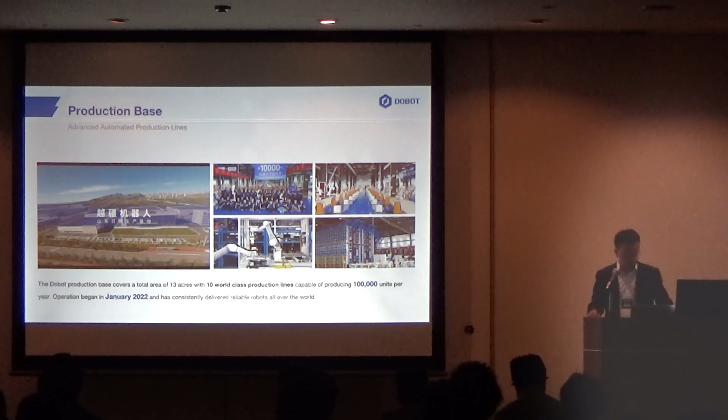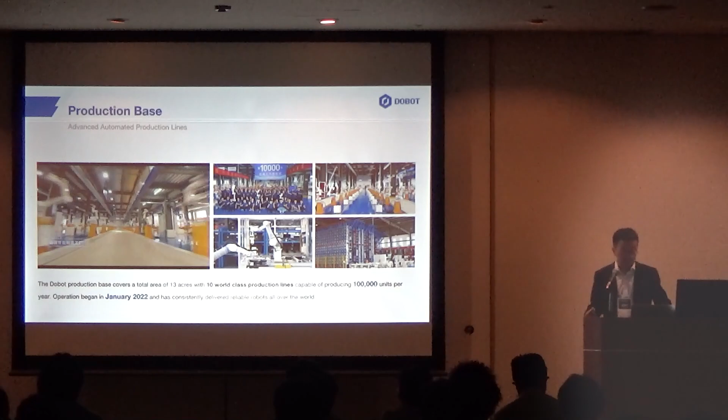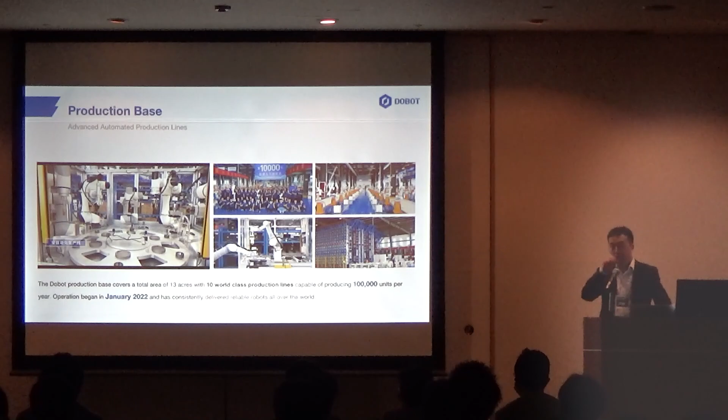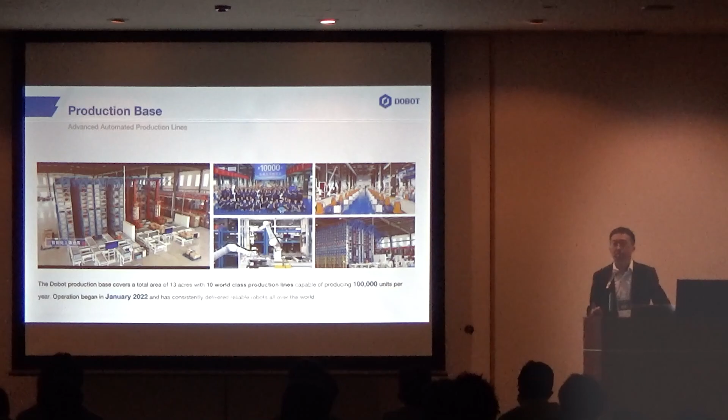In order to provide the best quality products, we also started to build our own production base in Shandong, China. With this factory, we can build our own production team and quality control team in order to have better quality products, because quality is very important, especially for a robot. Our production base has a capability of producing over 100,000 robots per year. The factory has been in operation since January of 2022, last year.

With the epidemic over, now we are speeding up our steps to go overseas. So we have started having a lot of events around the world, in Germany, in Japan, and other places.

Here is the whole family of DOBOT products. Starting from the middle, the DOBOT Magician. We developed this small desktop robot since 2016. In 2017, we developed DOBOT M1, and in 2020, we launched our CR series.

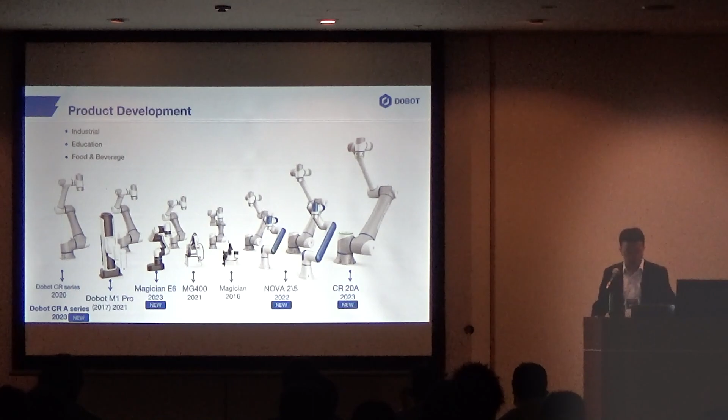After that, we sped up our process of development because we have accumulated a lot of technology about robots, and also we built a strong development team. We then launched our MG400 in 2021, and the Nova series, Nova 2 and Nova 5, in 2022. This year, we have the new generation of DOBOT CR series, and also the biggest payload CR20A, the one with 20 kilo payload, which we are going to launch this year. We also developed a Magician E6 for education. The robot will also be on the market this year.

First, I'm going to go through the CRA series. The CRA series is a totally different series from the CR series. But both the CR series and the CRA series will be on the market for the next few years. So it's not just a replacement, but it's an upgrade, a new series alongside the CR series.

The CRA series is a fully enhanced new generation. The A stands for advanced, with better performance and better reliability, higher protection for dust and water, and a totally new software architecture for the future.

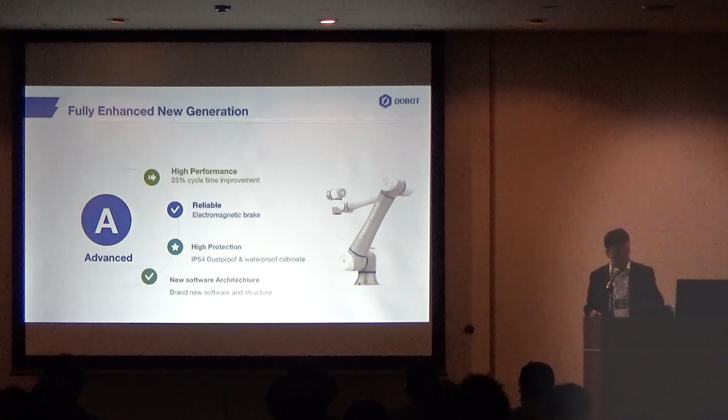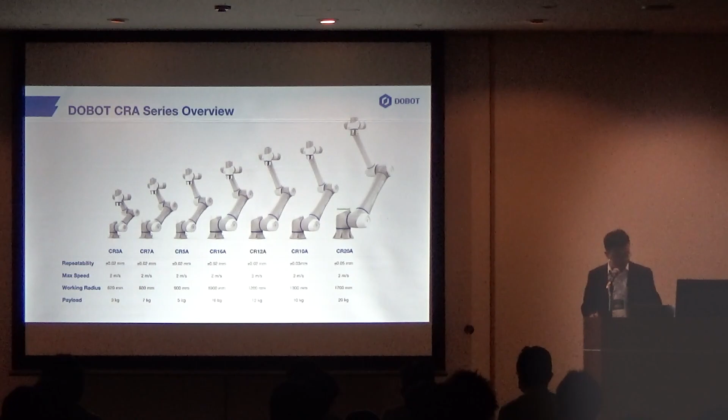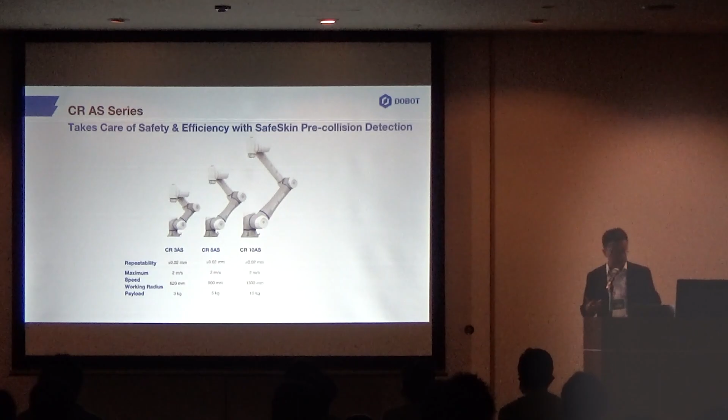Here is an overview of the CRA series. Similar to the CR series we have today, the CRA series also covers from 3 kilo payload to 20 kilo payload. We also have the series with SafeSkin, in order to provide safety and efficiency with our SafeSkin collision detection functions.

With a high performance harmonic reducer and more powerful motor, the CRA series can reach higher speed and acceleration. The cycle time of the CRA series can be improved by 25% compared to the previous model.

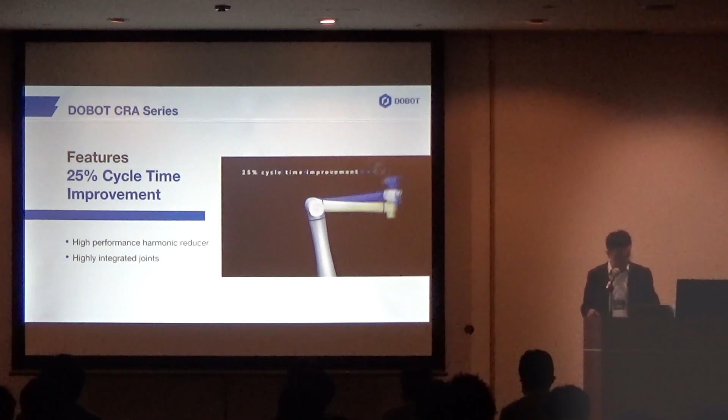For the CRA series, we also have an optimized motion control algorithm, for example an upgraded algorithm for anti-vibration, so the vibration is very small for the CRA series, less than 0.3 millimeter. Also, all the robots shipped out from our factory have been carefully calibrated.

With careful calibration, the absolute trajectory accuracy can reach 0.2 to 0.4 millimeter. That's very important for applications that require high trajectory accuracy, such as gluing and welding.

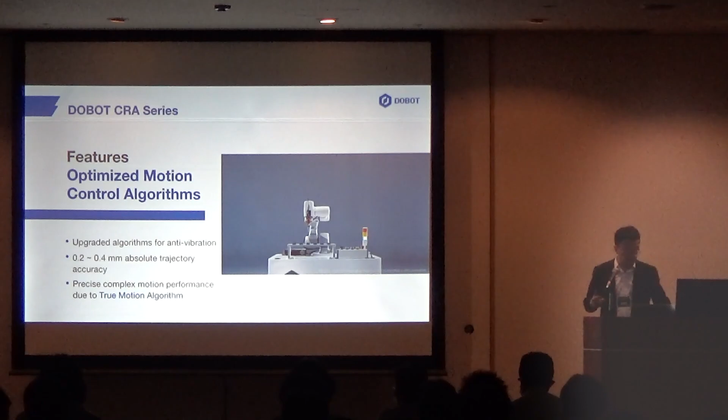We also have our true motion algorithm to improve the motion performance for complex applications.

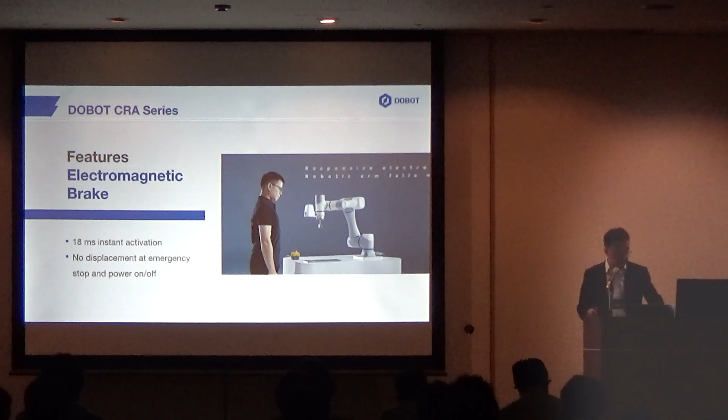For the whole CRA series, we improved the brake. We use an electromagnetic brake for the CRA series, and the response time could be 18 milliseconds, and the drop distance is only less than 1 millimeter.

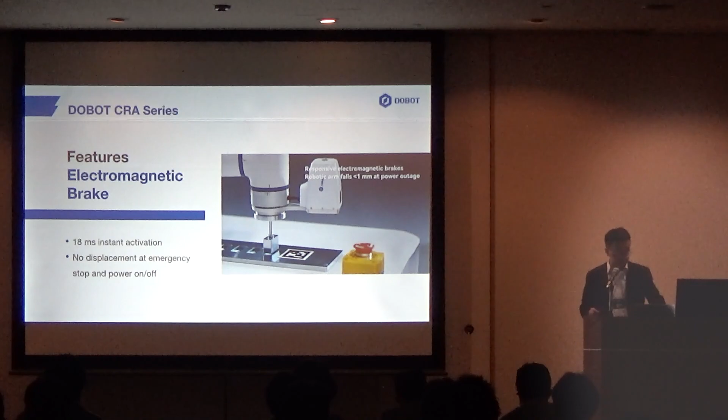For the CRA series, we also developed a smart camera in order for our customers to simplify the process of developing vision-based applications. The smart camera has 5 megapixel industrial grade resolution and a 12 millimeter focal length, and 14 high intensity LEDs at the end of the camera.

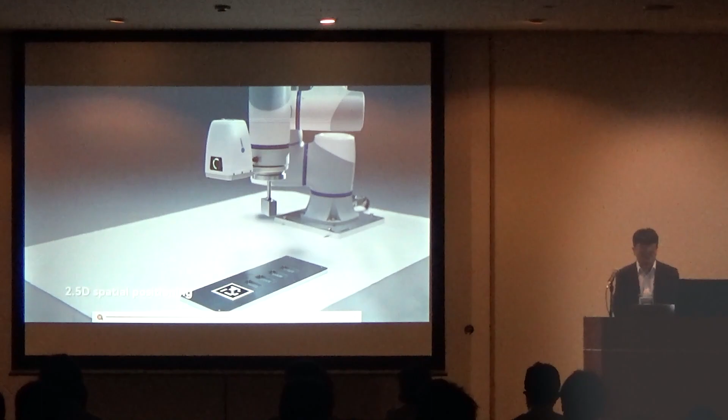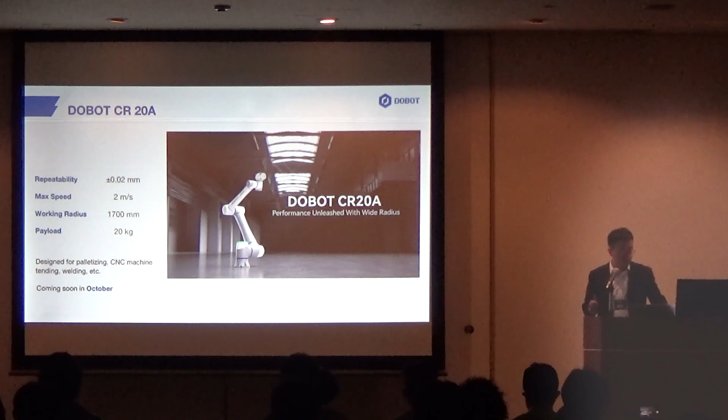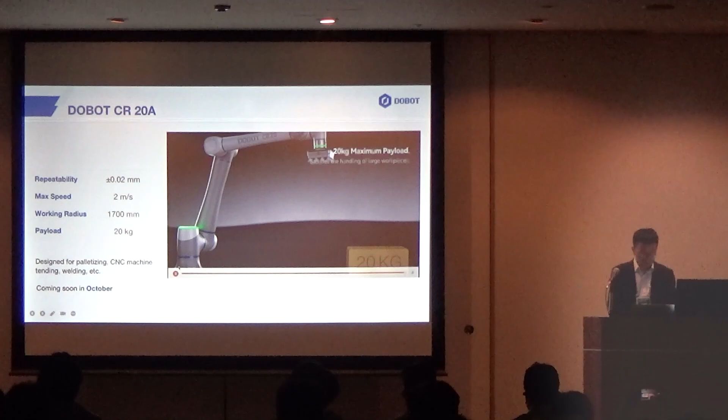And last, we have the 20 kilo payload CR20A. It's the biggest payload we have for the CR series. The repeatability is 0.02 millimeter, the max speed is 2 meters per second, and the working radius is 1,700 millimeters. The CR20A will come in October. It's designed for palletizing, CNC loading and unloading, and also welding applications.

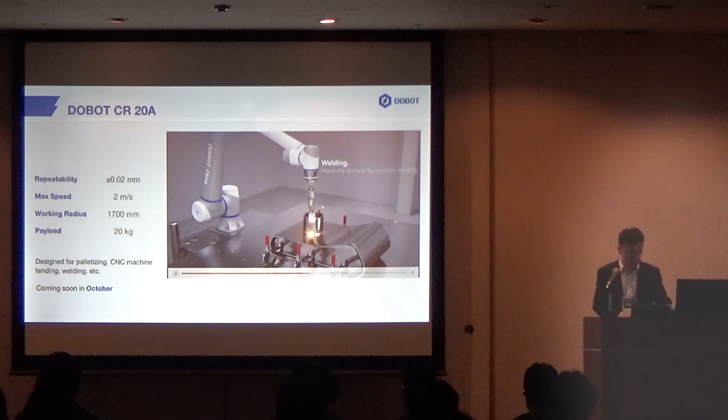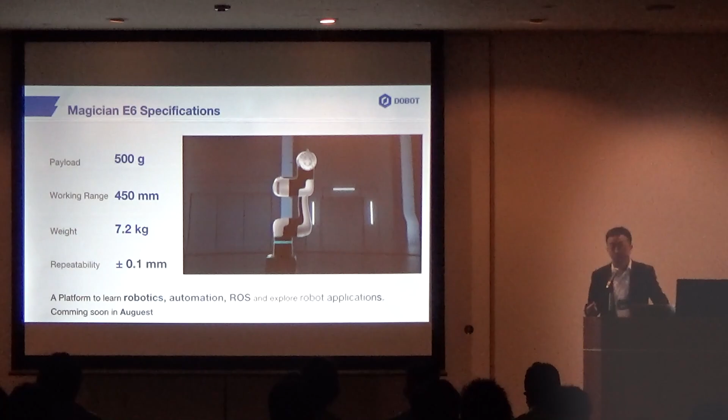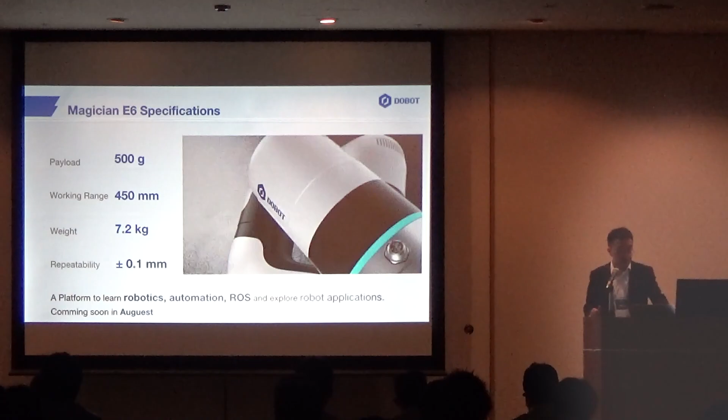This year we're also going to launch our education robot, Magician E6. It's a 6-axis magician. It's not the same as Magician, but it's the same market position. It is designed for education, as a platform to learn robotics, automation, and also explore robot applications for students. The payload is 500 grams, the work range is 450 millimeters, and the weight is 7.2 kilo. The controller is also built into the robot, so you don't have a separate cabinet. You can directly put the robot on the desktop and start working. The repeatability is 0.1 millimeter.

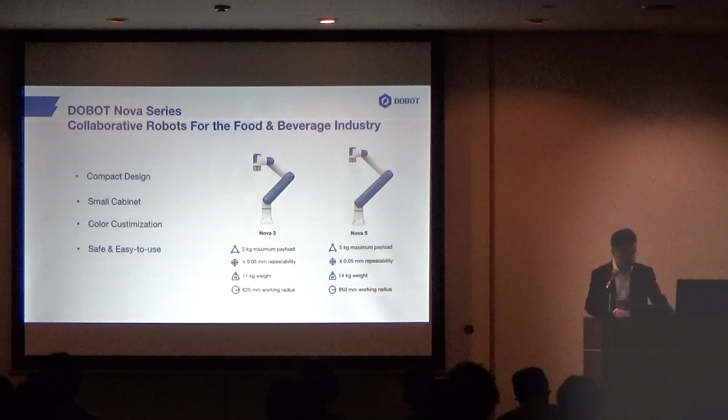Last year in August, we also launched our Nova series. It is designed for food and beverage applications. We have two models, Nova 2 with 2 kilo payload and Nova 5 with 5 kilo payload. It is a compact design. Comparing with the CR series, the robot is more compact and looks smaller, giving people a feeling of safety. Also, because the motor is less powerful, it's more safe for the workers. It also comes with a small cabinet, so it's much easier for OEM builders to integrate the robot. We also support color customization, because different stores may have their own decoration style, and they want the robot to fit in, not stand out totally different from the colors of their store. And of course, it's also safe and easy to use.

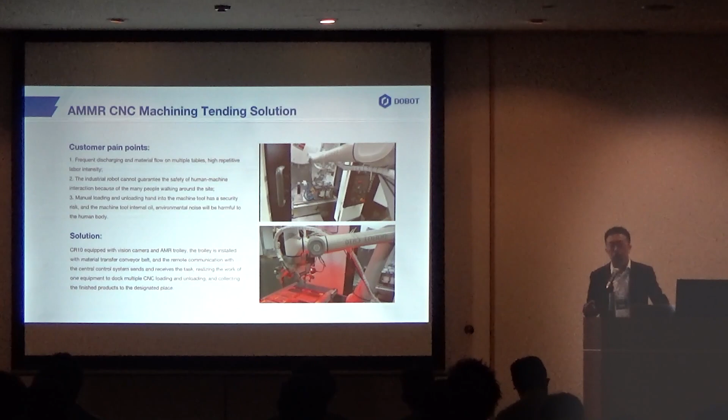Here I'm going to share some applications. The first one is the AMR machine tending solution. In this application, we are still using the old camera system, but with our new 2.5D camera, the VX500, this kind of application could be built in much shorter time. In a lot of these applications, the system integrator needs to solve the problem, develop the program for the AMR, develop the program for the robot, and also take care of the vision system. It's too complex for them. But with our vision system, this kind of application could be much easier. In machine tending applications, the AMR could replace people and do repetitive tasks, taking care of a lot of machines in a short time.

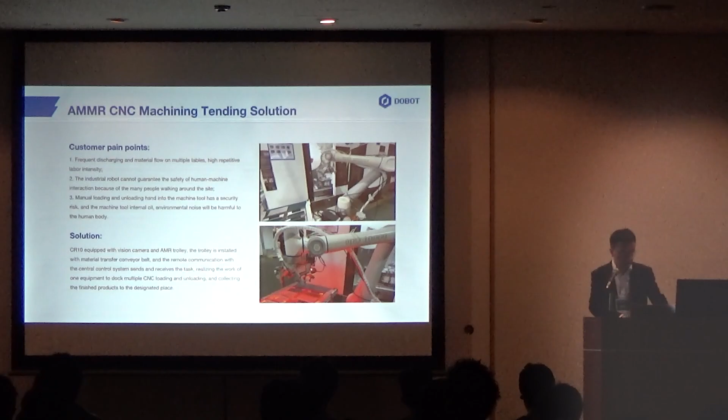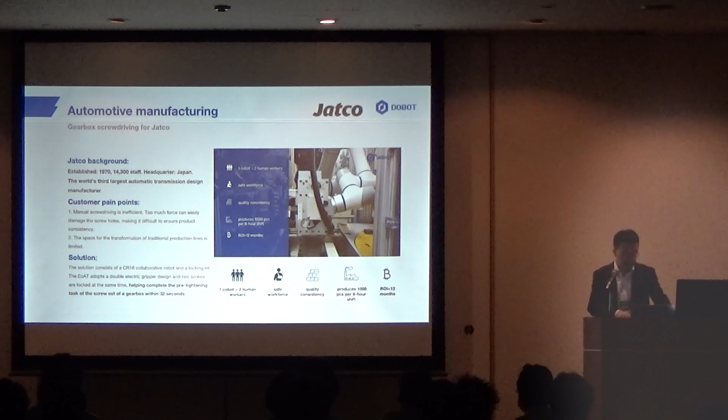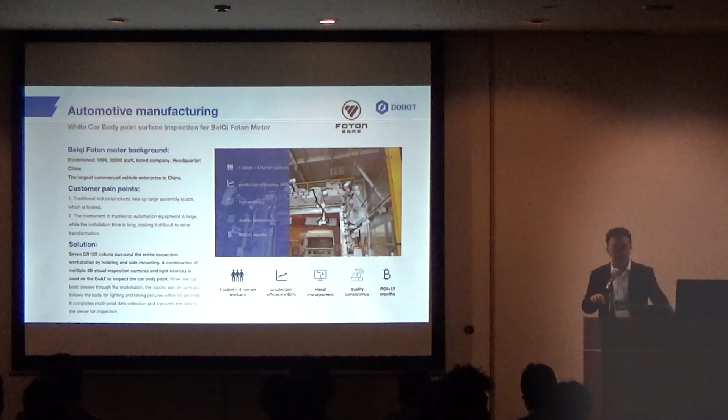And here we have another automotive manufacturing application. In this application, we use the CR series to carry the camera and also the light source to do white car body paint surface inspection. With the white car body moving along the production line, the robot takes the camera and inspects different positions, takes pictures, and sends the pictures to the server to do the inspection work.

MG400 is simple and compact, so it's very easy to be integrated into the production line, and they don't need to do a lot of modification on the current layout. Because MG400 is also very easy to use, sometimes we just give them the robot and they can develop the application very quickly by themselves.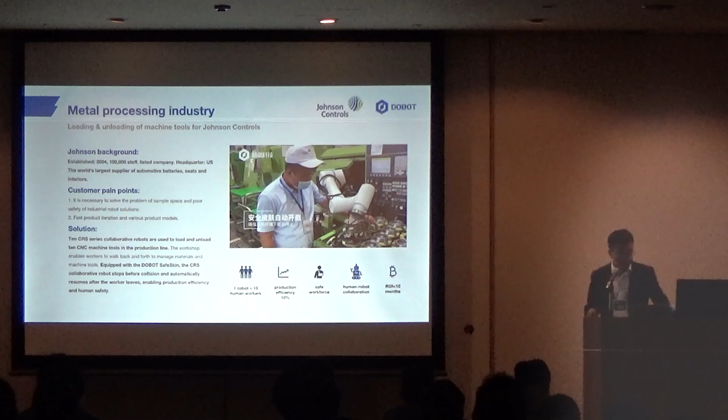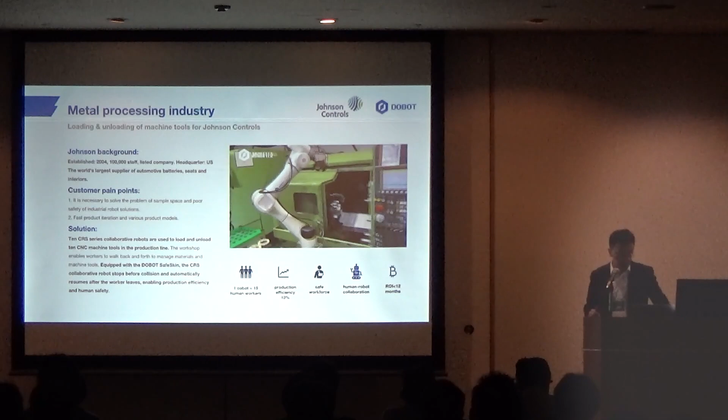Here is a metal processing application for loading components into the CNC machine, from Johnson Controls. Here we also show a SafeSkin, where the robot can stop automatically when interacting with a human, so it's much more safe.

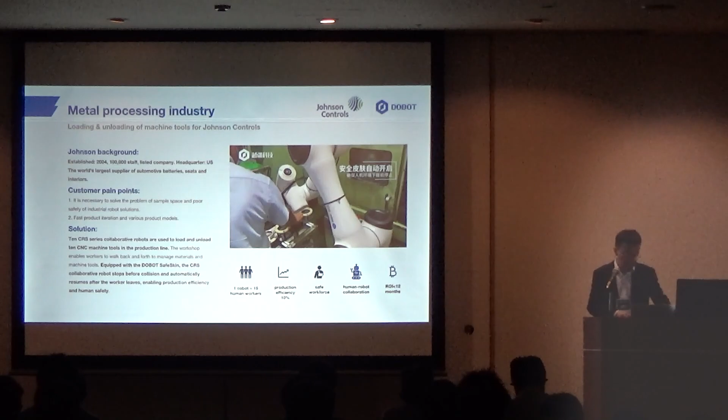Later this year, we are also going to develop a CNC machine tending application package, so you can use it to build up software with our CR series and provide CNC machine tending functions to the end customer. For the operators, you just need to set some parameters and click start to run the whole application. They don't need to program the robot every time they change the object for the CNC machine.

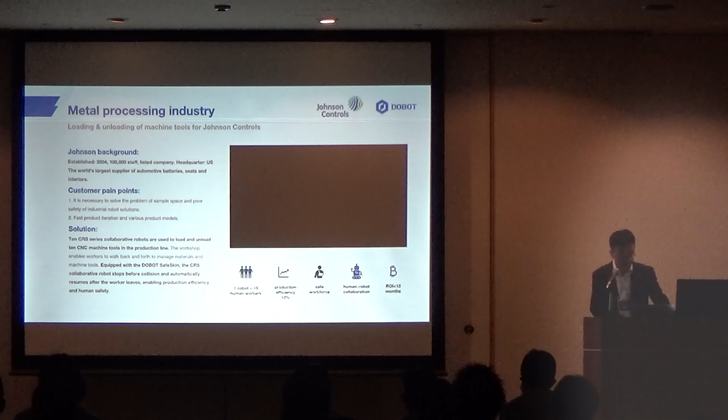And there are more DOBOT industry applications. Actually, last year we sold more than 4,000 CR robots, and of course most of them are in China because China is now the biggest market. But it also provides us a very good opportunity to test our product, to improve it, to find out the requirements of applications, and to do optimization for our robot. It's very good for us to improve.

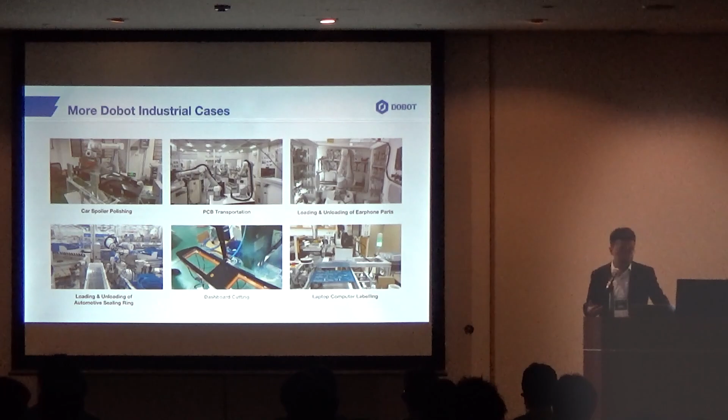Here are some food and beverage cases. All these applications shown here are done by the CR series, but it's also good for the NOVA series because in these applications they don't need very high speed, but they need the robot to be safe and compact.

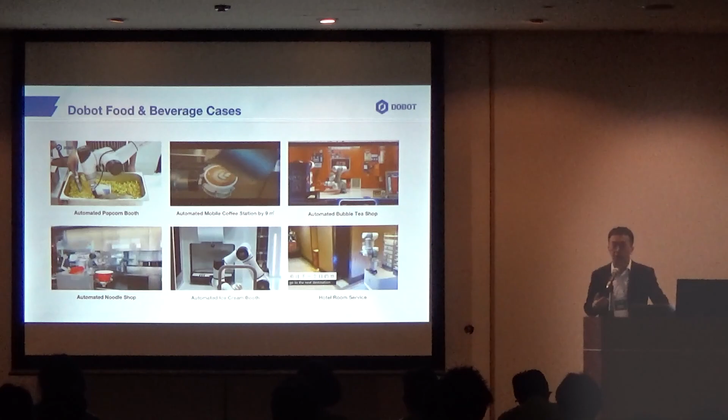As we can see, the NOVA series is much smaller compared to the CR series, and the NOVA series does not have the big joint, so in all the applications it could be integrated much more easily.

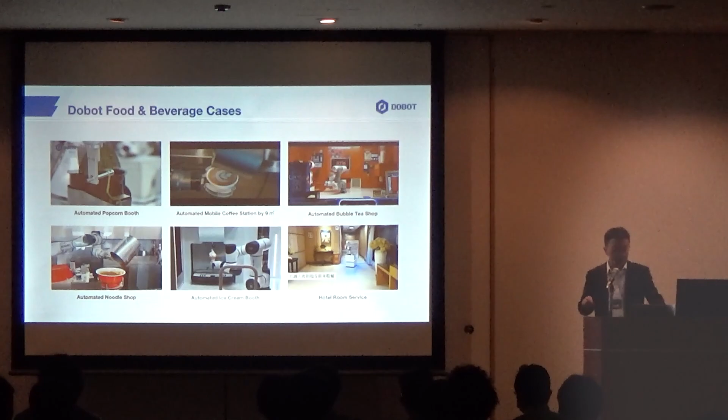This is a very good example: they built up a 9 square meter coffee bar. They used to have 2 or 3 people in the coffee bar, but now they can use 2 robots plus 1 staff. One worker just does the packaging, talks to the customer, and handles payments, and the robot can do the repetitive tasks for the workers.

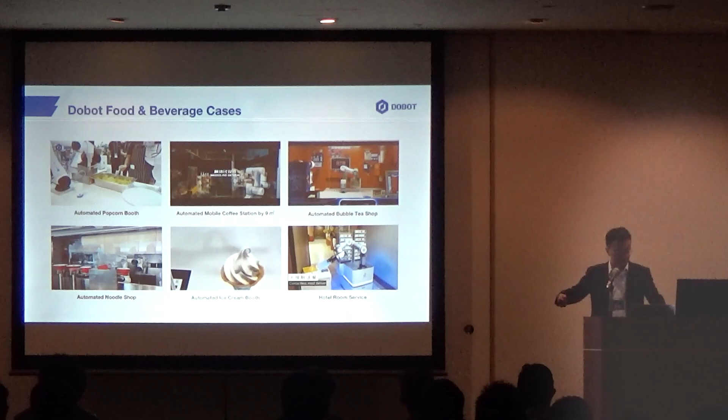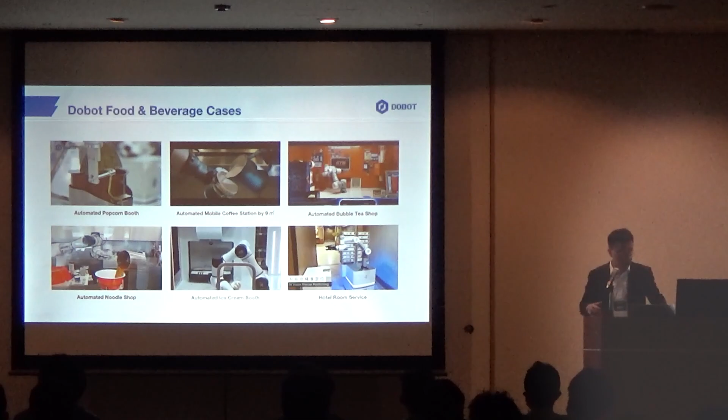So it's much easier. We also have a bubble tea shop, and here is a noodle shop, where the robot just takes all the noodles. The noodles come from a machine, and the robot puts the noodles into hot water to boil them, then puts them in a bowl, adds some extra meat and sauce, and then it can be served to the customer.

And also ice cream and hotel room service.

With all the robots we have, we can cover a lot of different industries, from loading, unloading, sorting, handling, positioning, gluing, inspection, welding, palletizing, and screw driving, this kind of applications. And there are more to be developed.

The key for DOBOT, the most important thing, is to provide the best robot cobot to our customers. And the application could be discovered with our partners and our customers together. If you have some special requirements, we are here to support.

One of the biggest advantages for DOBOT is that we move very fast. We answer to our customers' requests, we respond to them, we give them the best solution, we support them as much as we can. Thank you for today.